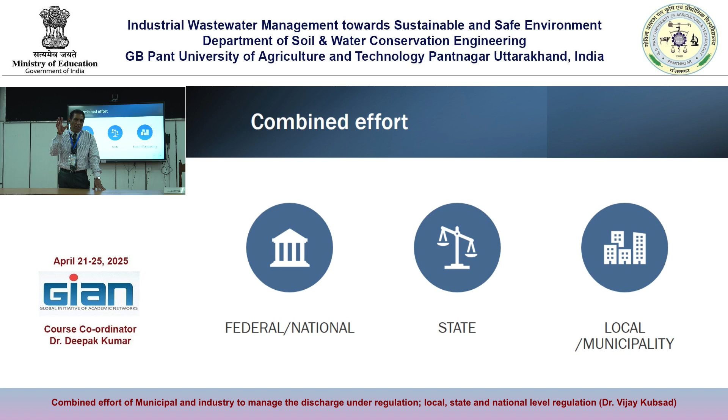You have seen the technologies. I wanted to also explore some of the technologies which we have implemented there and see how they are working, right? And you have also seen some of the things, how they are working. You can see the way of working, how it is implemented. You will see it is working there, here you see it is working. We want to expand, but there is a lack of understanding, right?

That's why you don't think. I was, later on, yesterday and today's discussion, I could easily understand there are a lot of PhD students, faculties, and master students, right? They want to do some research. That is why it is important for them to understand what is going on on the other side, what is going on here.

If your research or thinking on an environmental problem is not finding a solution to one problem, that is different. That is why you should understand very well that if you are doing more research, you are doing things which people don't know, right? That is what you have to do. So that's the important concept.

If you understand that very thoroughly in the beginning, then you can move forward. Otherwise, don't think that you are finding one solution, then this will form a big portion of my work, and that is not it.

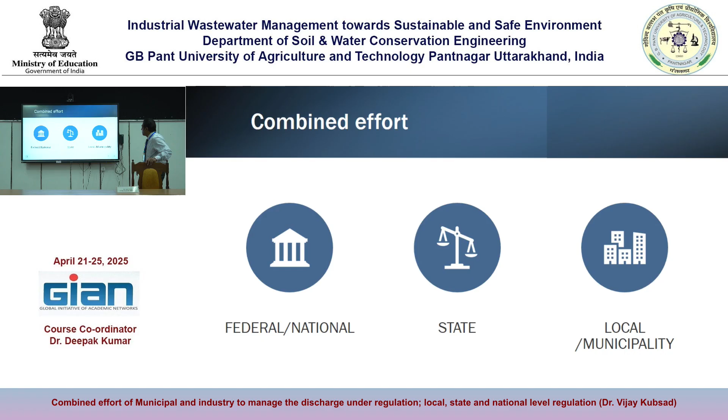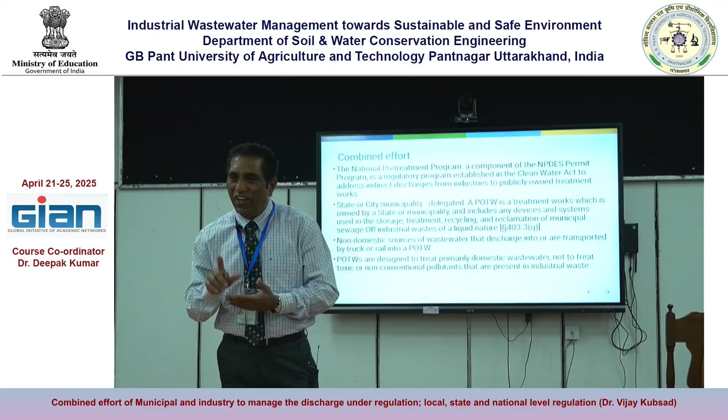If you see the combined effort, so I am coming to that. Earlier you saw different types of regulations being applied, and what is the focus here? Focus is to see how the combined effort works, that is what we want to do. We have seen who are the different stakeholders, what are their perspectives in bringing a solution, but you have seen them individually. Now you can see that you cannot solve the issue with only one group, one component. That is what I wanted to make you understand, how they cross each other, right?

When you are talking about the discharge to the river, you have never considered that the fishery is also a very important part of it. Here also, I think it is gaining more momentum, but there people are very much afraid. Your entire effort in doing something here, come to the end, and it will just go zero. So that is why you should know when you are doing anything related to that, because you are putting millions of dollars in this, crores of rupees here. So when you are doing that, you want to do it for 4-5 years without understanding who are the stakeholders. I am telling you this their scenario. If you do not know who are the stakeholders, you do everything, design and implementation, everything goes.

When you go to the discharge, if it is not working, there is objection. Everything, what happens? Who is responsible for that? You did all the entire work. You go there, people will come with hesitation. You have seen here in many of the projects, you did a lot of work, people do sanction, half work, their work is already done. Millions and crores of rupees have been spent here, and then everything is stopped.

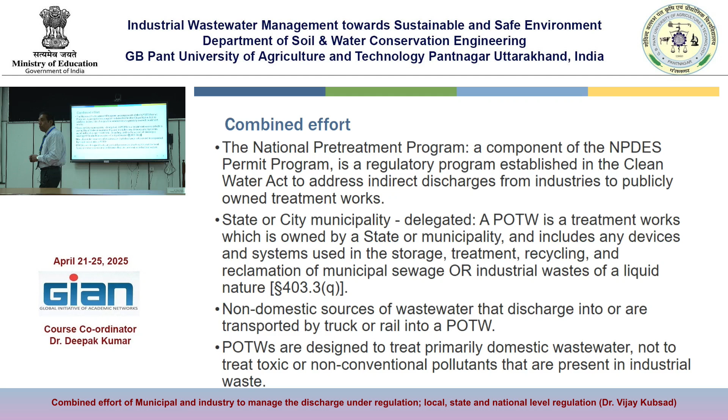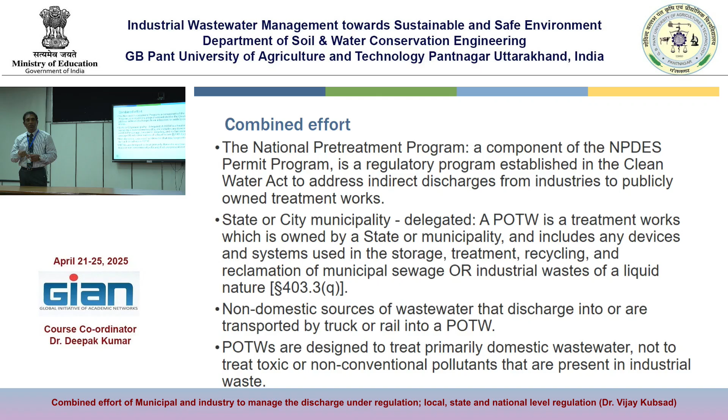So that is important in designing because the perspective is different here. You are going deep to understand who are the stakeholders, what are the possible consequences. Because when you design a treatment plant, you are designing it for 30 years, not just today.

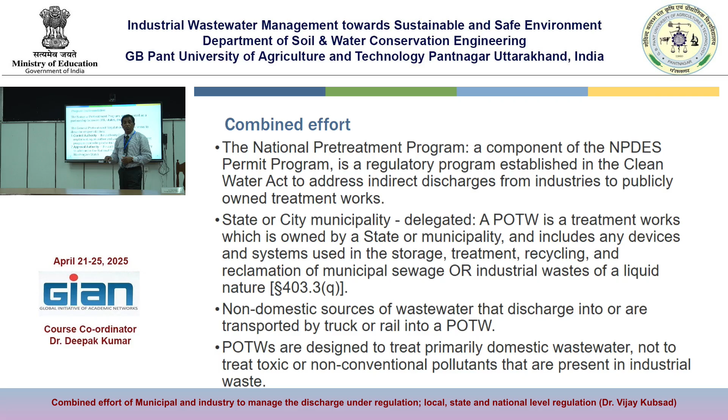It should work for 30 years, now and in 30 years, because you are spending millions of dollars. So that is the kind of understanding you should have - see the toxicity present from the industry. When you say there are lots of industries already existing, you have to consider each person - who are the major contributors, you have to take care of that.

If they go away from that system, your whole system will collapse. So that is why it is not easy like that. We should have this system, but there is a big understanding required.

So how long is it going to last? That is why you do an agreement - that is correct, but you can do an agreement, and yet there are many reasons they say things expected are not happening. It is possible that way they can go.

That is why a combined effort is very important. They should remain when you invest and build something - they should be your partners for many years to come. If they suddenly withdraw, what about the 75% of people who have also invested? The whole thing will suffer. That is why combined effort is important.

So control authority, approval authority - this is how we have talked about that.

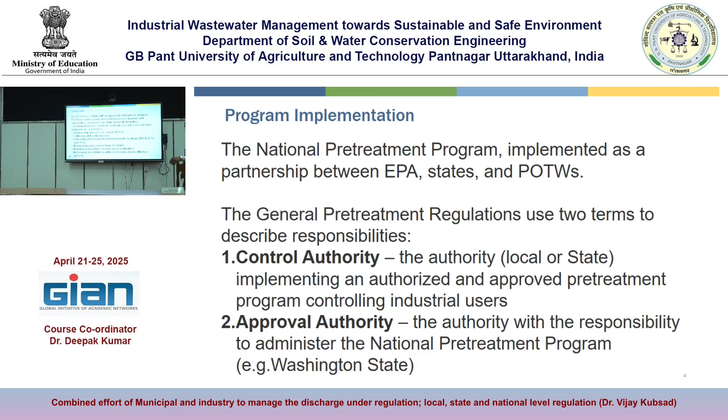When we design any treatment plant, I'm coming to a little bit of design treatment plant. We are not going deep into how you design, but you understand that your wastewater treatment plant is coming into place. But what factors do you need in data? If you are the person who wants to design, what happens? They ask you to provide the information. If you are not providing that information, based on that they will design sitting in the office, right? But who will provide the information?

So that is why, since a lot of stakeholders are involved in the whole system, many of these projects end up in the legal court, go to the legal jurisdiction. Once it goes there, you have already spent most of the money, and you are just stuck. The public money is just sitting there, and you are not solving anything. You have seen examples, I need not give any examples for that, but I am telling you about how we approach this.

That is why planning, when you are doing planning for designing any cities, big infrastructures, you will have to spend more money, more time, understand thoroughly each and every component, what is going to happen for 30 years, because you are spending a lot of money. What happens today, even though we say that municipal sewage treatment plant and industry, if you want to remove something, that decision has to be made at the beginning only, right? You are designing the system and later incorporating it, it is difficult.

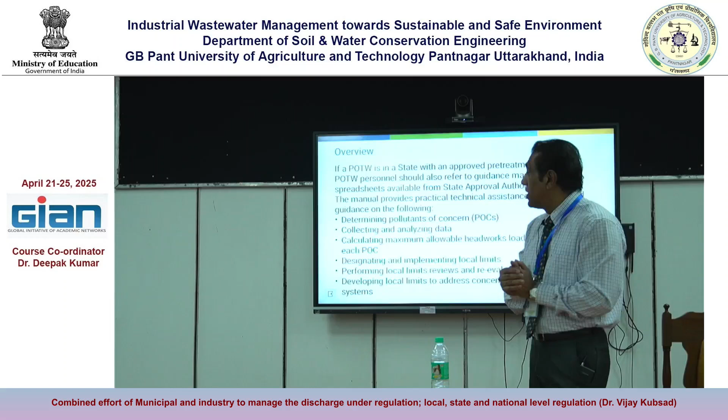Collecting, analyzing data, then when you do very good managing in a treatment plant, you are not just stopping at that point, you are going ahead. You are going ahead and finding out and scanning to see what other pollutants are coming.

Okay? Then what will you do? Then you will create a system. We will increase the frequency of measurement. You will add the measurements for that, and you will go on increasing the frequency, and you will see the trend, whether this trend started earlier. If it started earlier you can't do anything, it is already happening. So if it is happening, you are finding a solution. That is what I am telling.

When you found there is a problem, then you will start thinking and you should start fixing. At least, if you are that much of an expert in that area, you should do that. This is happening and this is there and you have to find. That is the true suggestion you can give. What the result is, is different, but if you have that expertise, you will have to do it.

Okay, so then calculating maximum allowable headworks and all that is there. If a big load is coming, you can understand because it is visibly seen. If the organic load is increasing, you will see because you are measuring. Today the concentration is this much and flow is this much. You will combine these and find out what is the kg per day of BOD, and here today and after 1 month it is increasing because you have still room, right?

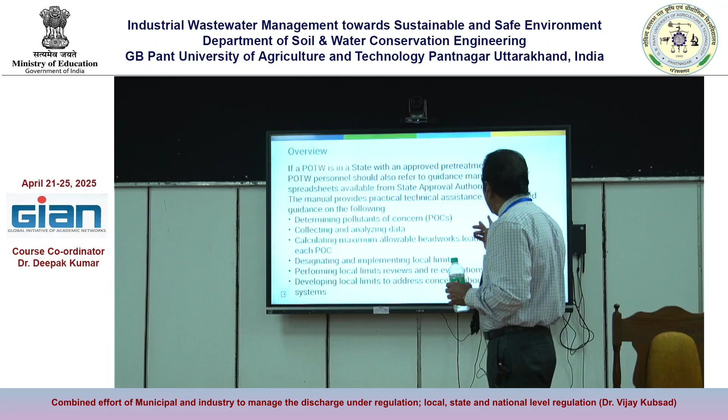You should also think about different limits for that, more stringent than the state and federal ones. That is important—designating and implementing the local limits, because the people who are working in this area should have more privilege to make sure that area is protected.

Only that much can be done, and that is very important. So, performing local limits review and re-evaluation—that's something we're digging a little deeper into. Once you set limits, are they still valid after 5 years? What was the scenario before those 5 years? There could be large development within that time. So what do I do? I do an evaluation—I ask them to re-evaluate their system, let me see how that is.

It's not a one-time process where once you're done, everything is fine forever until somebody comes with big flags in hand. No, there is a system—that's why you are building a system. You are not just doing things and going forever. Whether the people who built the system are there or not, the system should keep running, right? No one will work forever. That is why you need protocols, you need manuals, you need to know how you should progress.

What is your plan for 5 years, 10 years? How will you train people? Before a person leaves, he has to train others. You should give sufficient time for the training. But training is one of the very important factors here.

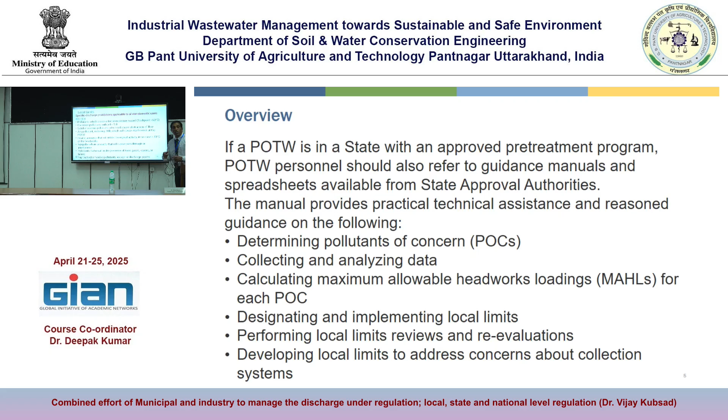So, performing the local limit evaluation, the local limit addresses concerns of the collection system value. You have seen many examples—the collection system should be right. Whatever they discharge should come to the treatment plant.

You have seen the consequences if the collection system or the discharging waste is not properly analyzed. There are many pollutants which can cause destruction - temperature, non-polar oil pollutants that result in the presence of toxic gases and vapor. We have seen these things, so that is why we have to understand the system of the sewer line. We have seen about the treatment side design, but the network is also a part of the system.

That is why it is important to protect. How will we protect? We will also study not only the discharge - whether it is 5 or below, whether it is acidic, it will corrode - but also the materials used for the construction of sewer lines.

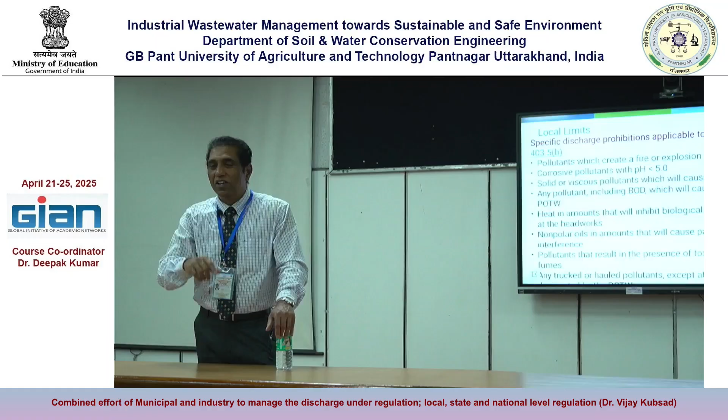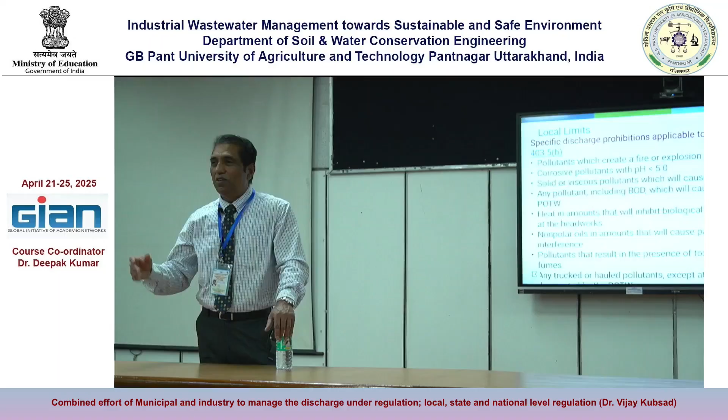That cost should be borne by the people who are just watching, right? So that is how the system is built. You have to have the economic ratio, done at a cheaper rate. But that is not so - you've seen people spend a lot of money elsewhere, but we prepare this cheaply. I've seen one Bollywood film costs this much money, and here they are paying this much - very cheap. Why? Because people are cheap, people's lives are cheap. Who will pay for the people who are watching, doing the testing and then getting down? If you send one person and just pay some money, that is why the cost changes - here it is millions, there it is hundreds, there it is thousands.

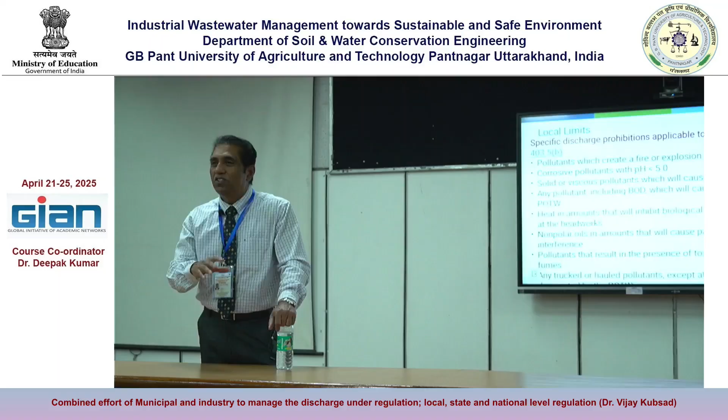Why? Don't be proud of that. Are we paying the workers correctly and giving them at least protective equipment? If so, the cost will go up. To bring a person and make them do anything dangerous cheaply - so that is what I was trying to tell you, the issues related to that.

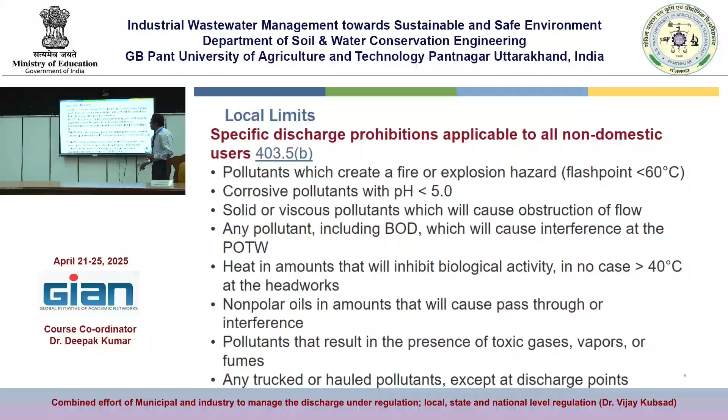Processes: protect the operation, ensure that discharges comply with state level standards - that is what we have seen, demonstrated specific limits, prohibition of discharges. That is important. If you know the pollutant of concern, you will stop them. So we are talking more about that pollutant of concern, and the approved pre-treatment program, right?

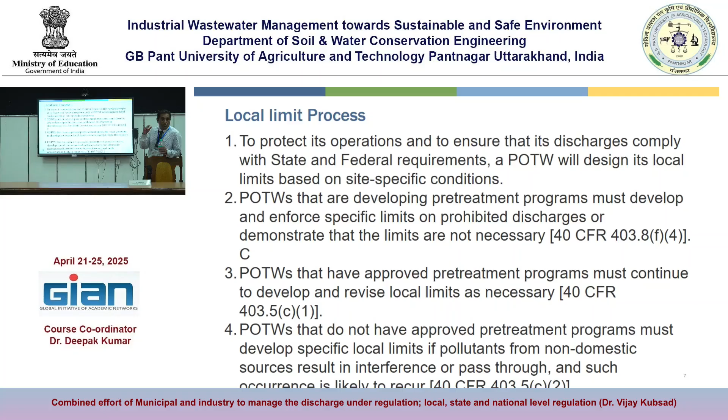Develop and revise, revision, evaluation - if you do that, you will understand more about the consequences. So if you do not have an approved pretreatment program, you must develop one specific to the place. That is the only way - you can't make a law for every town. You make a law, put in a clause, and those things become just a guideline. So things change as the size, requirement, criteria, environment, and purpose change. Don't just stick to that - you see the criteria under what circumstances they apply. That is why when you do the model, you see what range it works in - you cannot apply one model everywhere.

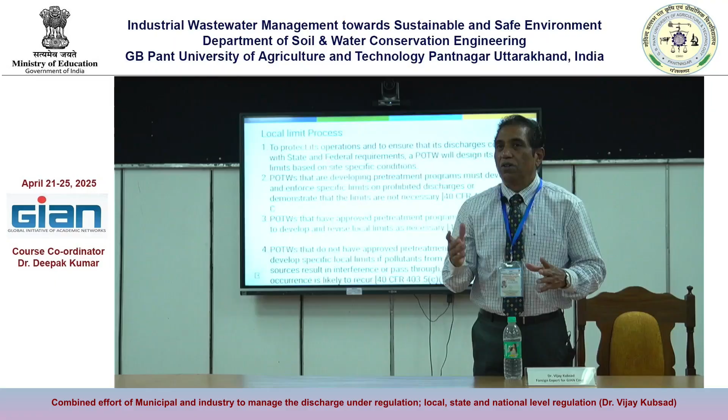If it is in that range, then only you apply that one. If any parameter changes, the base results of that model cannot be taken, because it is not applicable at all. That is why when they say 'model', you should first remember the criteria - it should come to mind. It is not that the model just applies - what is the range it was given for? That is why, as experts in that area, you should know what the criteria for that model is before you hear 'this model is applied'. So that is what I wanted to say.

What time have I been given? One second, give me the schedule, so I don't forget and take their break time. Take a break - no, this lecture is...

So we were trying to understand the other issues related to treatment, industrial treatment or domestic wastewater treatment, and what other components are involved. That was the purpose. We went a little deeper, having already understood different parameters and measurements. We went one step further to understand the pollutant of concern, and we also understood the long-term consequences. When applying any design, if a treatment plant is coming up, we started understanding not just the regulation and industry as stakeholders.

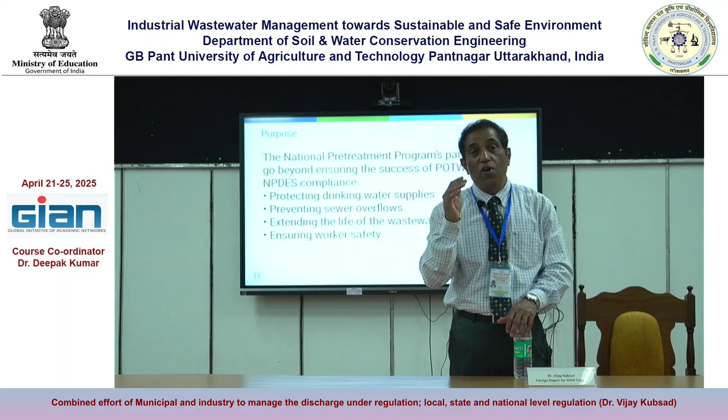Right, we have to take a river - if you want to take sampling in the rivers, many people know what important steps you have to follow. We will take a break.

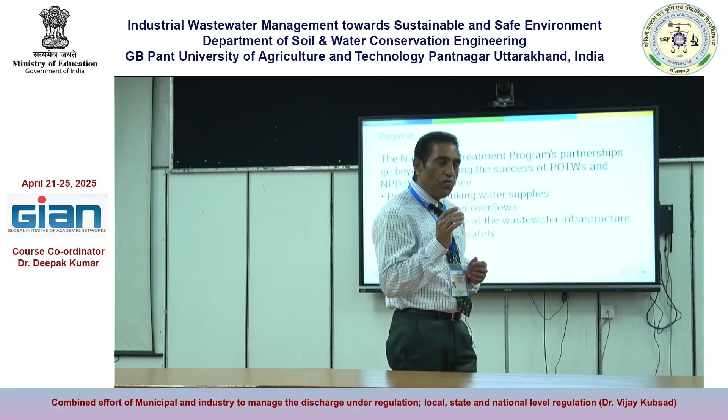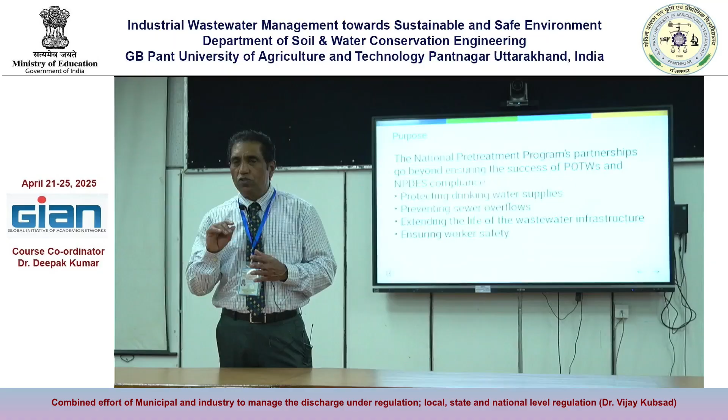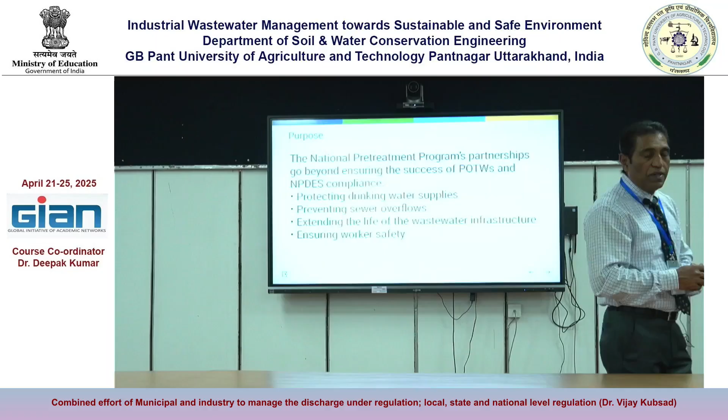I'm going to do that on land application. Our main focus of that tutorial is to remove priority pollutants. We want to focus not only on BOD but also on PCB, in addition to BOD. We have applied certain new technology to remove high BOD in winery wastewater in the earlier tutorial. I have a bit of video on that too, just 4-5 minutes, so you get a little grasp on how that works in the field. That is already working, in progress, implemented, and working well in both studies. I have executed them, we've done great data analysis, and one day you will see the results in research papers also. That is in the future.

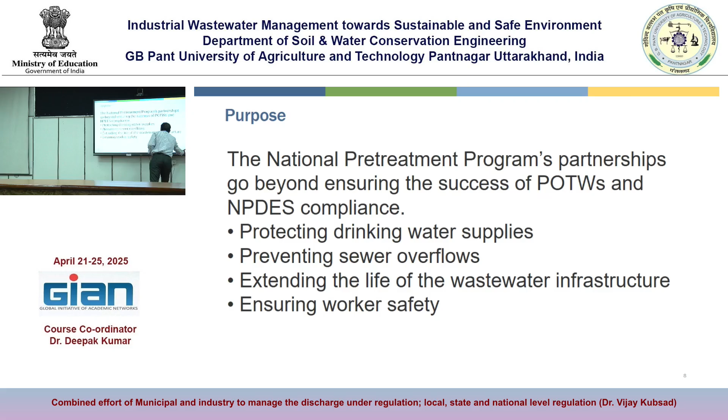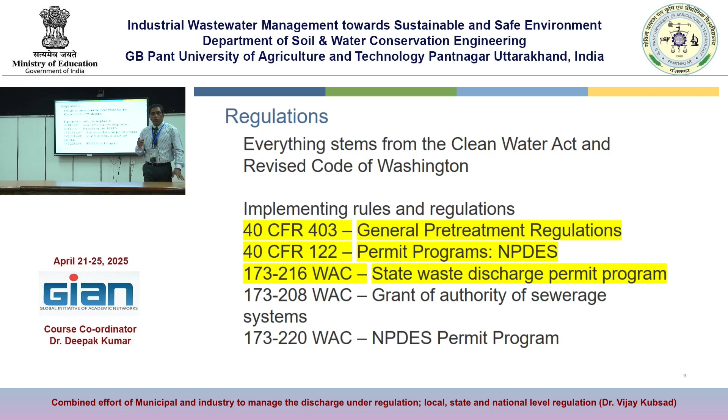These are the regulations. When you do that, you can find out how the rules are implemented, because you need regulations to take it to the next level. It also provides a lot of information to the people working. That is important - if we do not have a guidance document, how will you do it? You may be an expert, but still there is a procedure to follow.

How do you go to the industry? When you go to the industry, there is always an MSDS. Make sure that it is displayed there. Protective equipment, it is displayed there. It is not necessary for it to be in your computer.

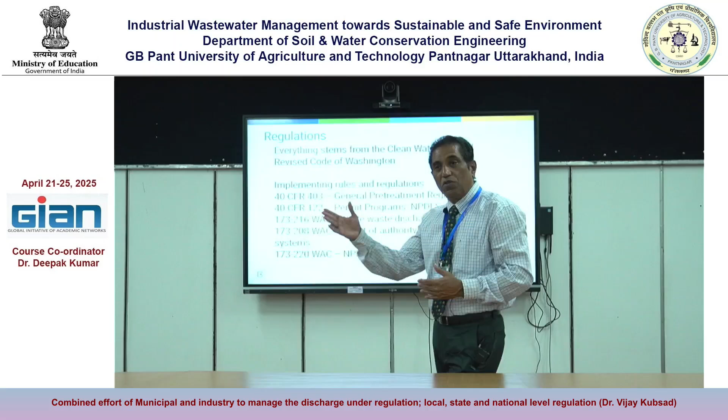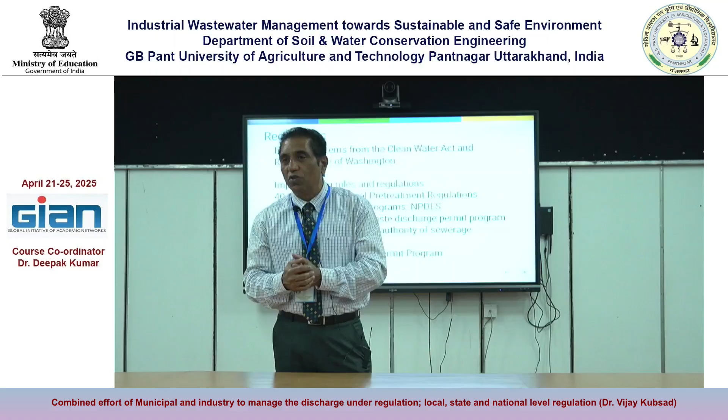Make sure it is physically displayed and visible. You should know the emergency procedures. That is why when we go to any place for a visit, the first step is safety protocol. They tell you, in an emergency, this is the way you have to act. The safety person comes in and tells you, this is our map, this is the place, if this happens you have to go there. A new person visiting may be an authority, but at that point this is important. That is what I expect will also develop here in the future. So those things are important in the system.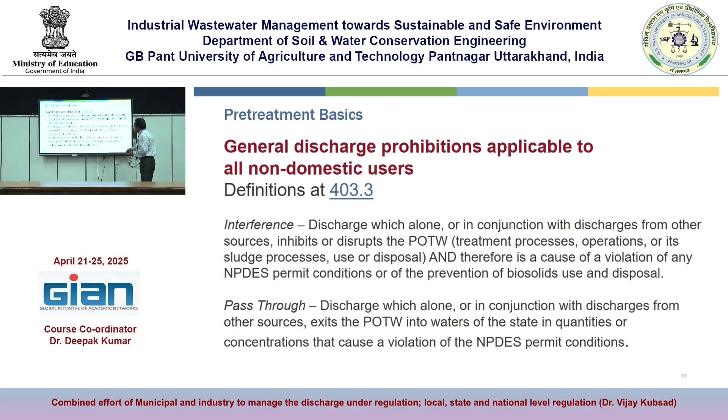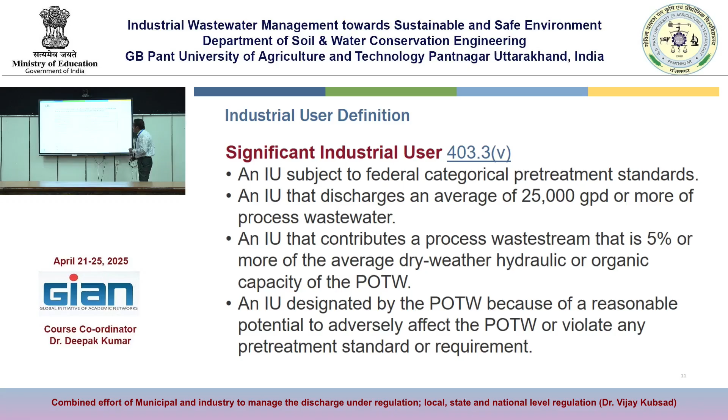Then the general discharge prohibition - you have already seen, we talked about the pollutant of concern and the general pollutants. Significant industrial users are those discharging a very high volume of wastewater. We have also talked a lot about categorical industries, where more contaminants are generated.

You have to be much more careful with these industries. They are the kind of activity where there is a possibility of having a pollutant of concern. That is why categorical industries, if they are doing anything, do off-site disposal, because the volume is less - it is not possible for one industry to do treatment for that.

But there is another important factor to that - they have to collect up to a certain level and then discharge. Make sure that is done properly. That should be your focus.

So we are going one step ahead, and I wanted you to ask this question: when you remove a metal, how do you store it when the tank is filled? There was a tank you saw there, no? All the metals were collected at the bottom. But I wanted you to ask, what is your daily production of metals?

Because you are an expert, not just a participant or member of the public who can just come and look. Your first question should be: what volume do you produce, where do you store this, which company is taking it, and whether that company is certified? Because a group of people may come - we have another system.

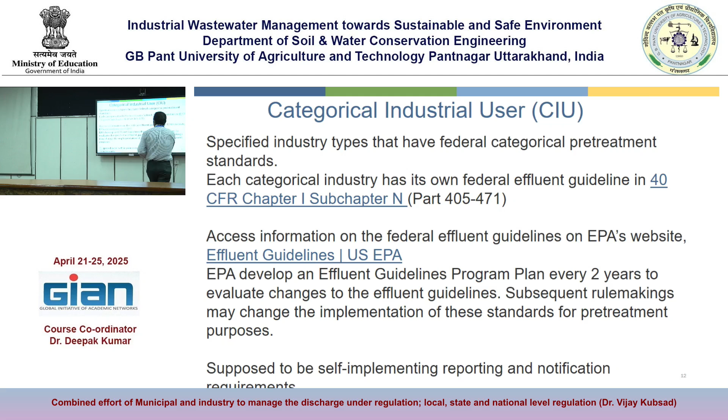That is why it is important to ask these questions once it is filled: how many months or weeks it takes, where you store it. When there is hazardous waste, how do you store it within your campus - there are regulations on how to store it, how many days you can store it, what the guidelines are. So your focus should be on that categorical industry and the number of pollutants generated from different industries.

Asbestos manufacturing - asbestos is almost gone, right? But there is a separate rule for that. If it is asbestos, specific people will come and make sure that it is free.

They have protective equipment, and they cannot just take anything and put it anywhere, because all the time it is contagious. It may cause a severe problem in breathing. That is why you have to focus on those things rather than just looking at the bigger picture. Very common things the ordinary person can easily understand, right?

That is the focus. Then fertilizer manufacturing and all, you should know that if people are involved with the soil background, when applying wastewater to the crops, you make sure how much the crop uptakes, how much is going down to the groundwater, is there any contamination, that kind of stuff you should be remembering and asking them, and see if there is any procedure they are following, any guidelines on that. Those things are important. You should always look at that level.

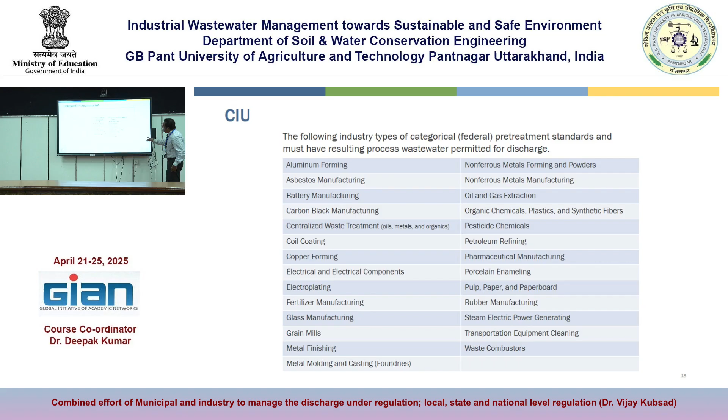There are a list of industries. When you say you are dealing with a particular industry, try to understand what you should focus on, right? So we have seen there are different areas where we are delegated and all. I have given a list. So where we authorize them, they run the program on behalf of us, then we oversee.

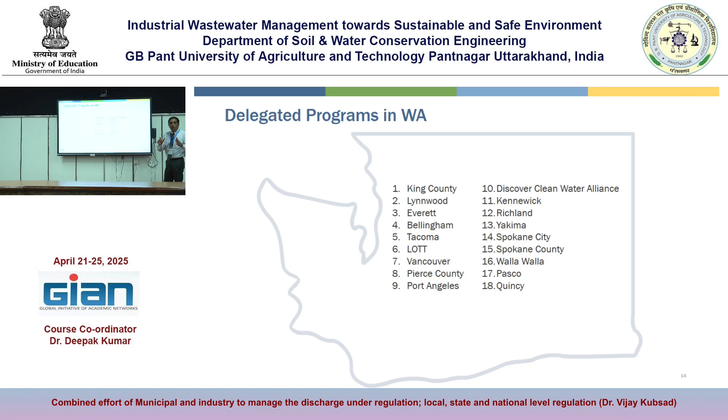This is some of the category, typical separation of responsibility, non-delegated. We are authorized and we deal directly. That is the difference.

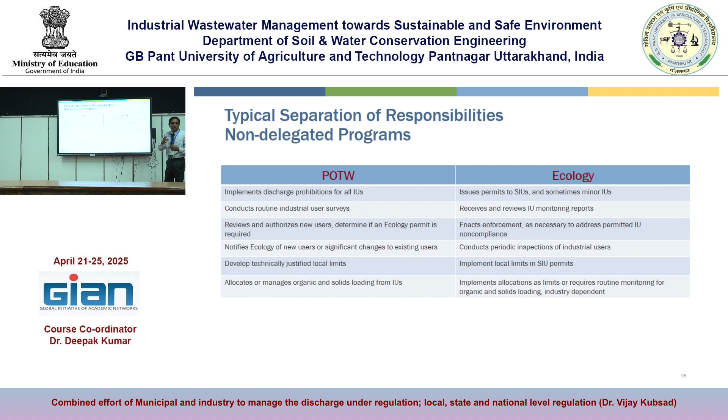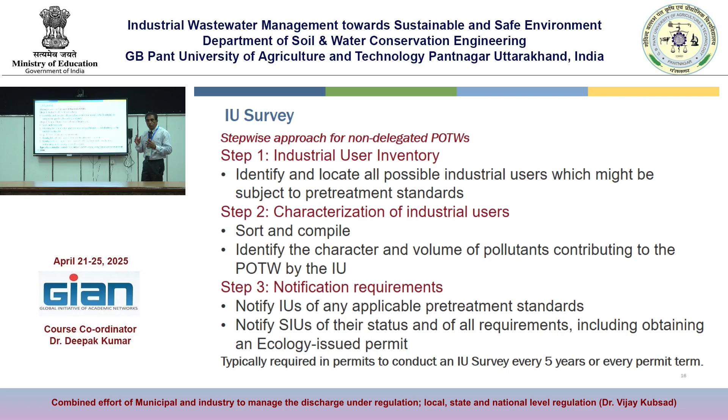So industrial survey, we talked about this in detail, how to identify which industry is existing in the town, what you have to do, what they are manufacturing, all of it should be under the radar. This we have already covered, how the survey is done, what are the different industries.

So essential elements of legal authority. You should have essential elements like right of entry, and if there are confidentiality requirements. There are some technologies when they are submitting an engineering report, you have to protect. How will you protect it? You should have that. You should not allow anyone to just disclose their technology. And also at the same time, it is important which is confidential and which is not confidential.

I have mentioned this a little in the beginning. But if the public has the right to go and see any document, they can ask. There is a right for every citizen to ask for any document to see what you are doing, what they have submitted, what is going on. It's completely open, right? So these are things we have covered along the way.

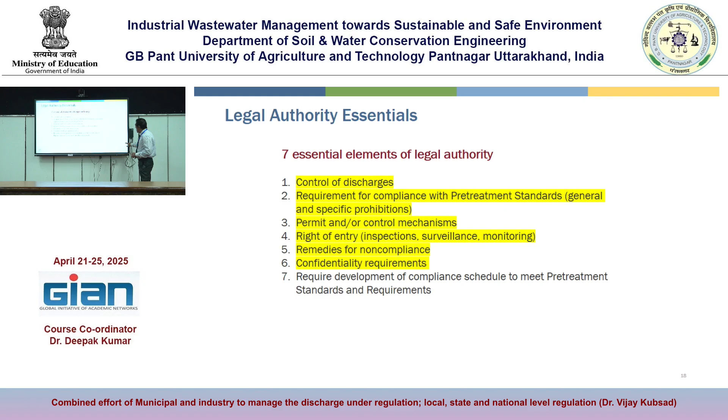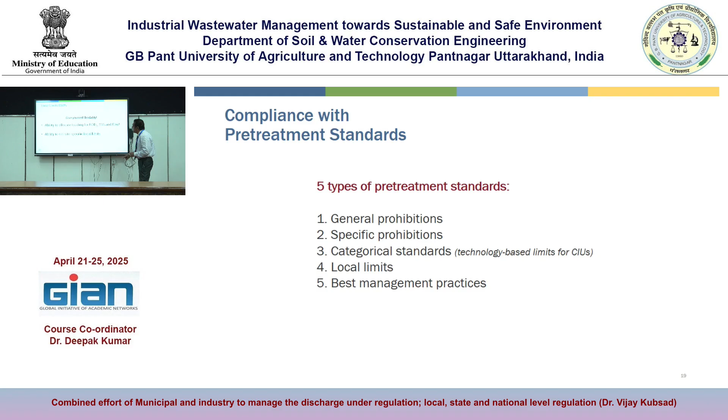We have already talked about the control mechanisms, discharges, right? We have also seen the general prohibition, specific categorical best management practice, and the ability to allocate loading, TSS flow. This is another important point when a group of industries are discharging to the receiving treatment plant. Load allocation is important. You allow this much load only that you can discharge. If a higher load is coming, that is not your responsibility. What they can do is have a storage tank there, then they can inform.

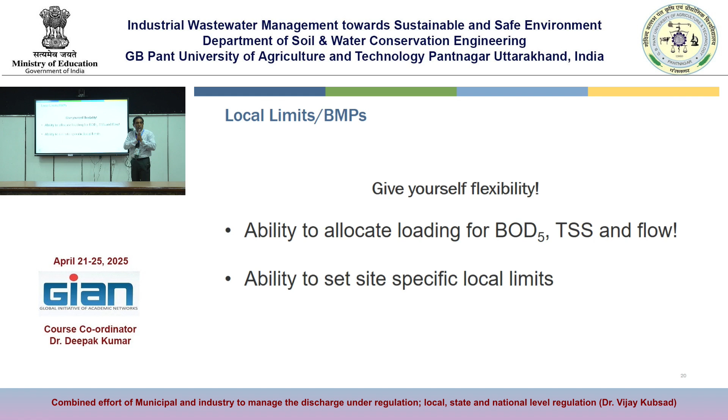So that is one of the things you will have to see in case of an industry common effluent plant. Your first question is what is your loading, and what are the loadings of the tributary industries discharging to the common treatment plant. Your focus should be that. You should not just be general. They are running a common treatment plant, working alone. You should go one step deeper and understand that.

Inspection monitoring, we talked more about that in the beginning, in the legal structure, and also if that doesn't happen, what tools you have to use when approaching the legal court or any legal action. You should have a perfect document.

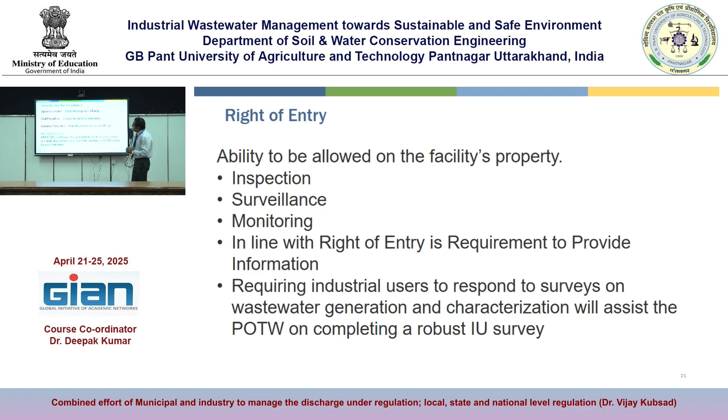So we have seen about other penalties. We also talked more about the confidentiality requirement. There is a requirement for how you have to protect, how many years you have to protect, what portion of the document you have to protect, and how you will protect it.

There is a separate concern because they are always worried modern technologies are being developed. It cannot be that someone will just come and steal like that. That's why there's copyright, and it's different from different organizations and different types of documents. We talked about that a little further, so you should be able to see how it can be maintained and when it can be disposed of.

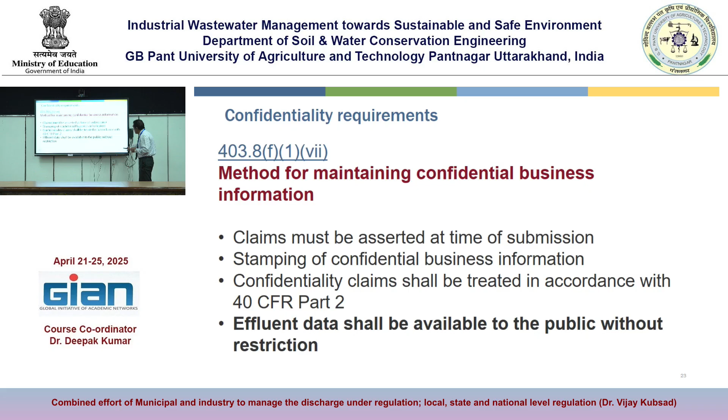They cannot have that confidentially in your office forever. No, there is a period, and after that, it is just gone.

So benefits of FOG control, we have talked about that. If the oil and grease is not removed properly, how it will cause issues. Because I train people on FOG control for different cities - yeah, how we do lectures, I also do them. For American Public Works Association, once a year I do that for them to understand what is the importance, what they should do, what they found. We have great interaction, and we modified many systems which were in error for many years, and then we corrected them. So that is how your focus should be when you are doing it.

That reduces the maintenance cost. You should find out the root cause for the poor quality, not just fix it temporarily, right? So that should be your focus.

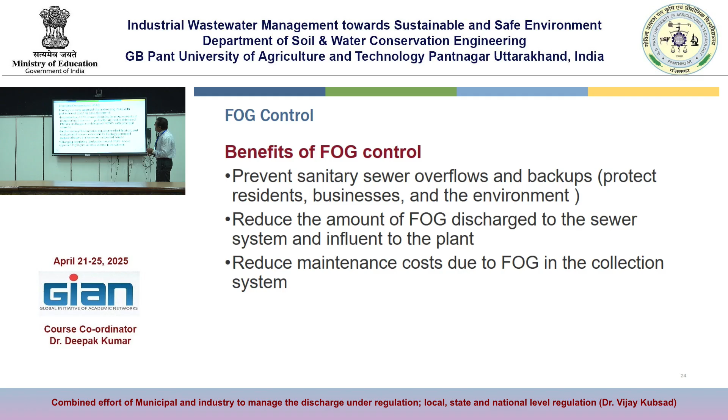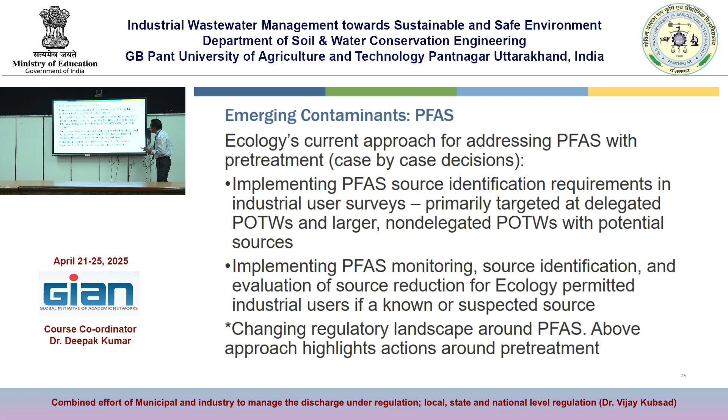And emerging contaminants, we have talked about this. I told you yesterday also, I took a separate slide. I just wanted to cover a little bit, but we talked about this, so this we have already seen. There was a good question. I wanted to give you a little flash that there is existing emerging technology. When you look into that, you can also find more information. There are documents available. Some people are stepping forward, irrespective of the regulations - some people who are working for the ecology, I mean, to maintain the environment. So they are stepping forward to go ahead and fix their problems.

And identify the sources of that. We have talked about this.

Very good questions. So what we did, what we understand in this combined effort - when we started, I will give you 10 minutes, then another 5 minutes, I will summarize why this is important. We talked in the very beginning about 3 layers, right? So as we move forward, you understood it is not just the regulation and industry.

You started understanding who are the other stakeholders, how important they are, right? You are not just treating general parameters, you are knowing about the general parameters. At the same time, you are also giving importance to pollutants of concern. There are a number of pollutants of concern, and how they are formed is different - that is the difference, right? So you are digging a little bit more to understand these are not only the parameters. You are experts, you should know a little further. So if anybody is talking about that, you will say there is much more to it. You don't need to be just happy by looking - it is 300 here, it is 220 - so that's the very intent of that.